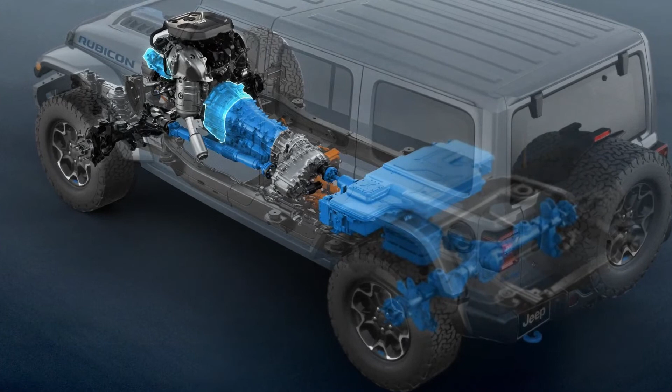Wrangler 4xe is the most technologically advanced Wrangler ever and sets new standards both for the SUV category and for 4x4 traction capability. It combines the power of a latest generation turbo gasoline engine with two high-voltage electric motors, enabling Wrangler to deliver its best performance of all time in Europe.

380 horsepower combined with maximum torque of 637 Nm. Let's see what is the propulsion system that makes this possible.

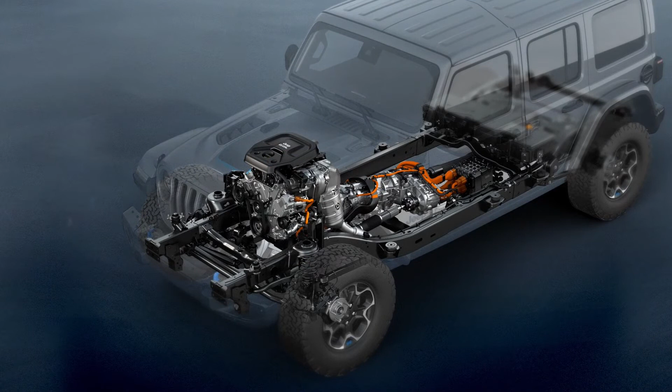The internal combustion engine is a 2-liter direct injection turbocharged gasoline engine of the global medium engine family, and provides exceptional responsiveness, performance and fuel efficiency.

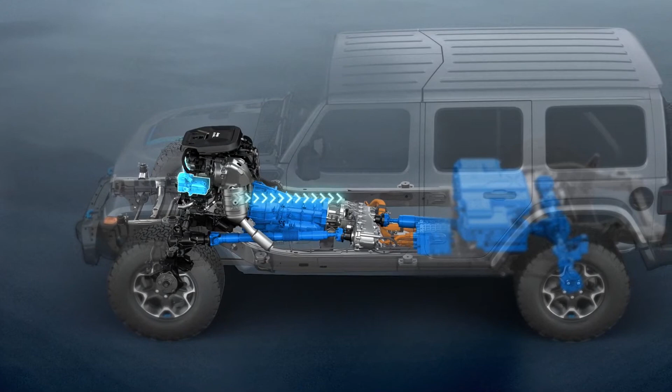Let's move on to the electric part. A high-voltage, liquid-cooled electric motor generator is mounted on the front of the engine and replaces the alternator. This motor generator delivers extra torque to the engine, ensures seamless start and stop operation, and generates energy for the battery pack.

The second electric motor generator is mounted in the robust and well-proven TorqueFlite 8-speed automatic transmission and replaces the conventional torque converter. An on-off clutch is mounted between the engine and the e-motor.

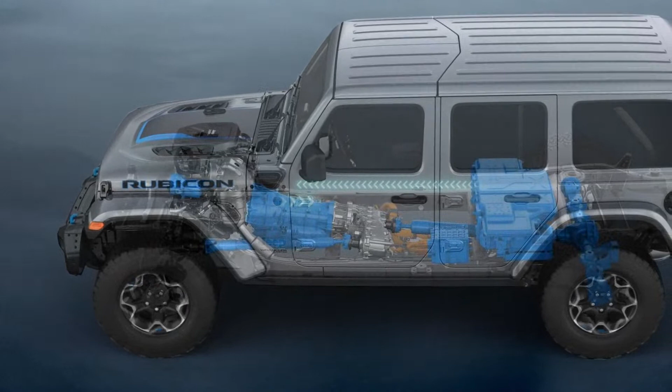When the clutch is open, the electric motor drives the transmission in fully electric operation. When it is closed, the torque from the engine and the e-motor combine together. A variable clutch mounted behind the e-motor manages engagement with the transmission to improve drivability and efficiency.

The technical architecture has the double objective of emphasizing the advantages of electrification and maintaining the traditional Wrangler capability and features. The engine and the two e-motors are installed upstream of the sophisticated 4x4 mechanical systems that Jeep is famous for, ensuring an intuitive interface and significant improvement in performance.

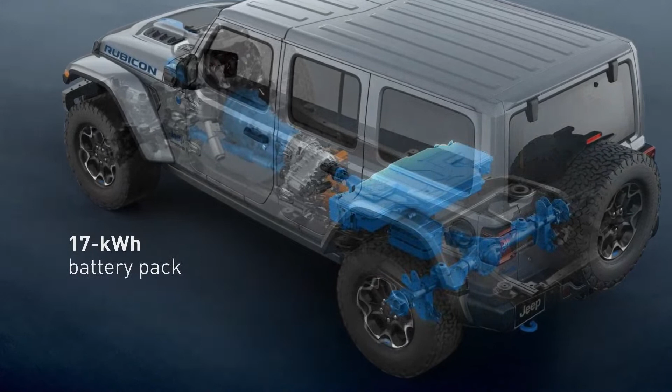We are talking here of 0 to 100 acceleration in 6.4 seconds and around 70% reduction in CO2 emission on the WLTP cycle. Talking about the battery, Wrangler 4xe is equipped with a 400-volt, 17 kWh battery pack with 96 lithium-ion cells with NMC chemistry.

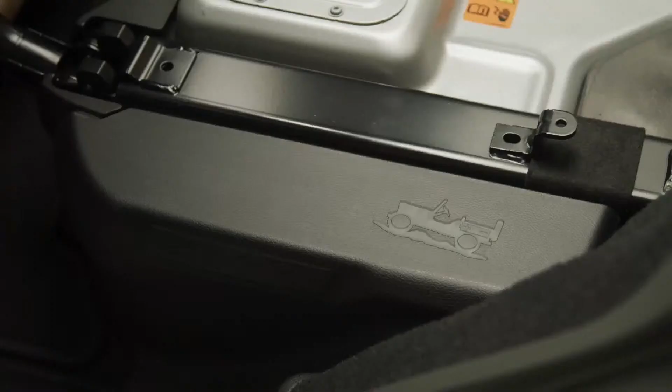The battery pack is mounted underneath the second row seat and protected from outside elements. The Wrangler 4xe's second row seat is redesigned, allowing the bottom cushion to flip forward for access to the battery.

The system also includes an integrated dual charging module which combines the battery charger and the DC-DC converter in a single unit, and a small side power inverter module.

The moment of charging has come, but we don't need to worry, it's a very easy and rapid operation. The battery can be fully recharged in less than 3 hours, with charging at 7.4 kW using 230 volt equipment. And the Wrangler 4xe allows us to schedule charging time whenever we prefer.

For example, at night, when electricity is cheaper. The battery level monitor is mounted on top of the instrument panel, making it possible to check battery state of charge at a glance.

Wrangler 4xe is made to suit any driver and any trip, always offering maximum control. As always, the whole Wrangler 4xe range is equipped with full-time 4x4 systems. All-wheel drive can be switched on and off, and low-range gears engaged when necessary.

We can also pick one of 3 drive modes operated via the E-Selec button, where hybrid is the default mode, blending torque from the engine and the motors. And when the state of charge is sufficient, we have pure electric drive at our fingertips.